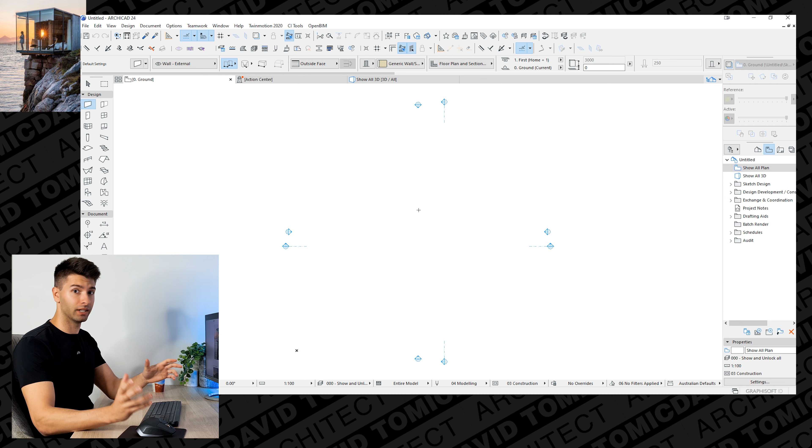So what we want to do is go to File, down to Save As, and save it anywhere you want. For me, I'll probably save it onto the actual desktop. Click Save. So now that we've saved it, it's going to continuously autosave if you've set that up, which is by default set up on ArchiCAD 24.

What we're trying to do is replicate this image here on the left, which is a beautiful container looking home sitting on the edge of a cliff. It is a relatively simple design and relatively quick and easy to model. So this is a video for all levels of ArchiCAD users. So in my personal opinion, the best thing to do here is start by actually modeling the main body of what we can see here and then progressing further on from there.

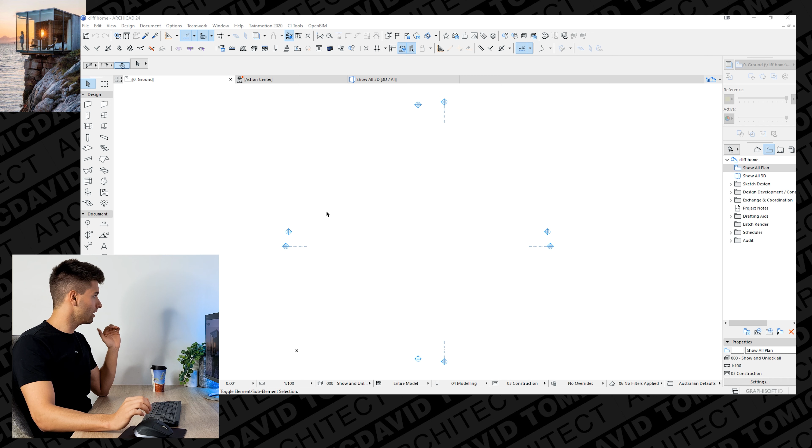So if we look at this image here on the left, it has a very thin mono-pitched roof going 1 degree backwards. It sits on what appears to be a concrete floor on 2 I-beams, and it's relatively self-supported underneath of the rock. So we're going to start by modeling the base of the floor, moving up to the walls, then to the roof, and then modeling all the elements around, and then we'll slowly start to integrate the furniture as well in part 2 of this video.

The first thing you want to do is open up the level settings, which is either Control or Command depending on your system, and pressing 7. So this opens up our story settings, which as you can see here, we have ground, first, and roof. The first thing you want to do is insert a floor below and call it footings, because we can see that we have these I-beams underneath and they are technically our footings in this development. They don't need to be 3 meters. I think they're probably only about 180 UBs, but we'll go 200 for the purposes of argument and keeping it easy.

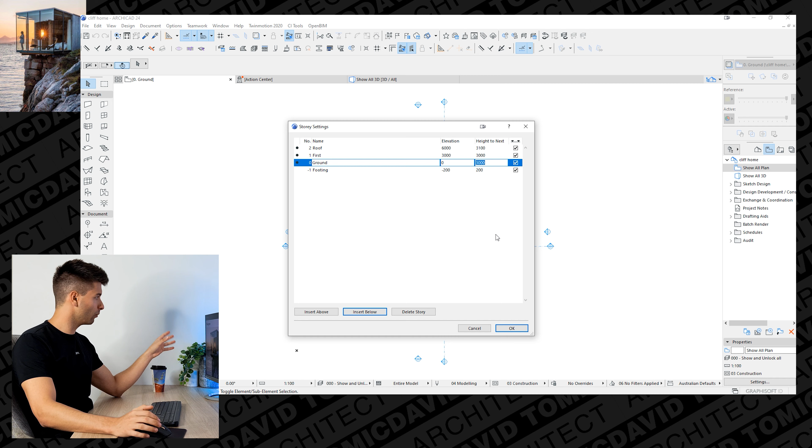The ceiling in this space looks quite high, so this lady is probably about 1.6, 1.7 meters tall, so at the pinnacle of that is probably about 3 meters. So it's safe to say that we can keep the ground floor to the first floor as 3 meters. However, because we don't have a first floor in this, we can delete that story, so we only have our footings, our ground, and our roof. Personally, I like to uncheck these on the side to remove them from elevation views later on, but you can keep them on, you can keep them off. We'll come back to that in a little bit.

So you just press OK, and because we've deleted the first story, it's going to come up with a warning. You just click delete anyway because we're not really interested in it whatsoever. So as you can see, we're already on our footings level, but because we've created a new layout, we're going to go into our organizer.

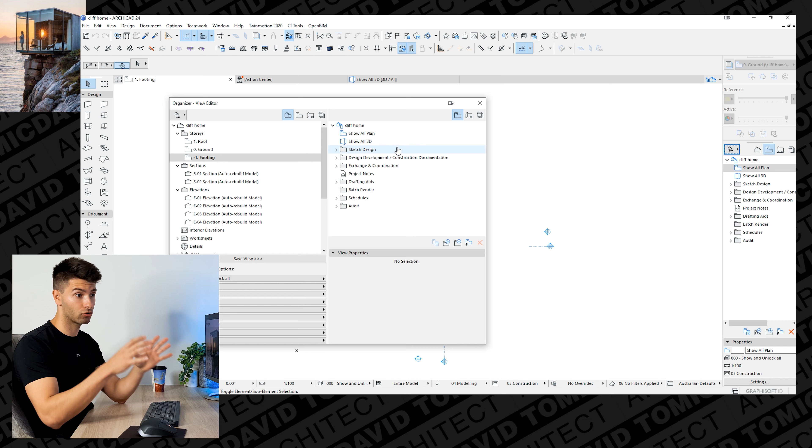So clicking this little house here, going down to show organizer, and then opening up the organizer and reassessing how we actually structure our organizational point of view. So for me, it's always easiest to just drag and drop these and create a new folder here. We're in Sketch Design, we have all these views already set up, but personally I'm gonna hold Shift, click on Roof, and drag and drop that into Sketch Design.

I'll also rename all of these to just footings. I'll probably do them in capitals, footings, rename, delete, ground floor, rename, delete, roof plan. And if I close this now, you'll see that they've popped up on the right-hand panel in our organizer under sketch design. Again, you can structure your template however you want.

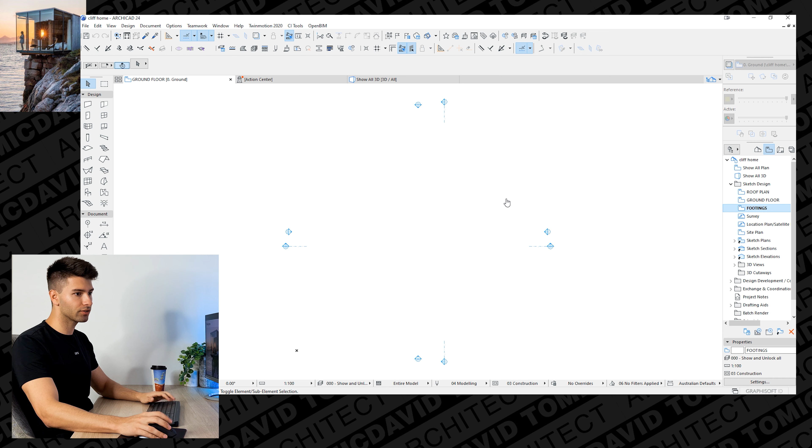My personal template is structured completely differently to this, but this is the standard template that you get when you open up Archicad. So you can see if we go into ground floor, this up the top left-hand corner changes to ground floor. We go back to footings, it changes depending on the levels. So we'll start with the footings in this case, and we'll start with just a relatively simple slab. So the slab actually sits inside the building itself because the windows go past.

So what we're going to do is create a slab using the slab tool. The slab can be generic. We'll edit the spaces and the model preferences later. So we'll start by creating a standard shipping container size. So a standard shipping container is about 6 meters long and about 2.5 meters wide. That's the 20-foot model. You can get the 40-foot model as well. It's probably not a standard shipping container, but we're just using that as the base of our guide.

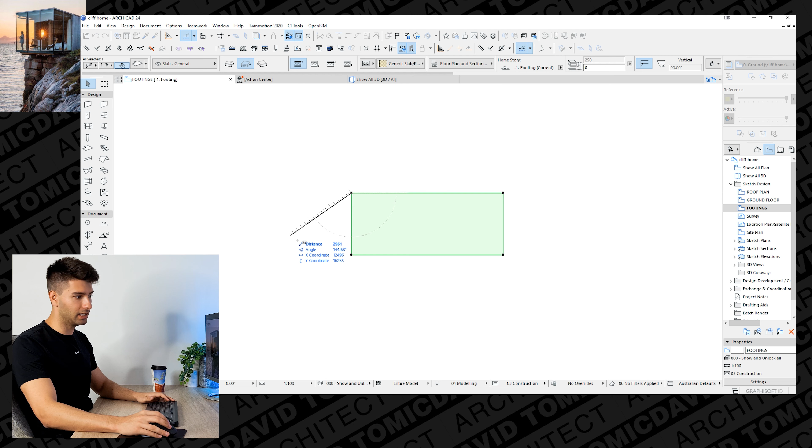So we'll create that as 6 meters by 2.5 meters. So now that we have our slab that is 6 meters by 2.5 meters, we can press the M key to bring out our measuring tool and double check that. So that's 6 by 2.5 meters, and we can start developing everything over and above that.

So we can see the master bedroom is at the front, and then I'm assuming we have the rest of the little hotel style room overlooking the cliff at the back. So we'd have predominantly our master bedroom here at the front, our entry probably at the back, and our bathroom in the back corner. So we're going to go back up to the ground floor level, and that footing will disappear. So what I'm going to do is right click on the footings and go show as trace reference, so we can see where we've actually created our slab.

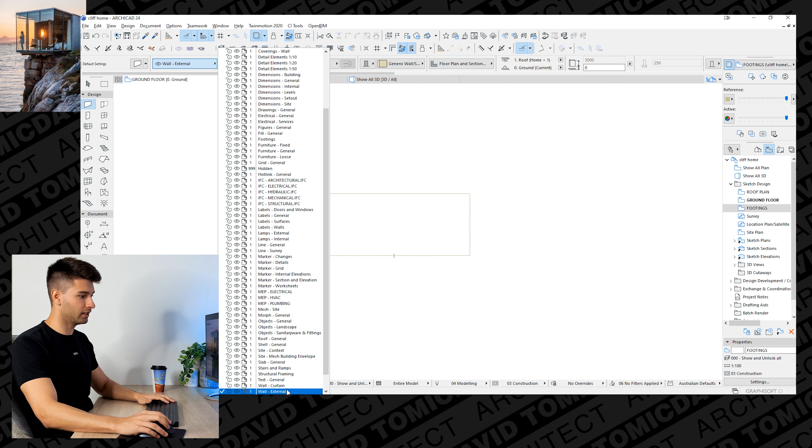And then we're going to move over to our wall tool and make sure that it is on the walls external layer. The next thing we're going to select is the type of wall. So looking at this, it'll probably be some sort of timber frame structure with a timber cladding around the outside. What kind of wall you select is completely up to you, depends what you're trying to create. So at the bottom, you'll see we have a 70mm stud partition or a 90mm stud partition. Personally, this would probably be a 120mm stud, but because it's simple and easy, we're going to use the 90mm stud option.

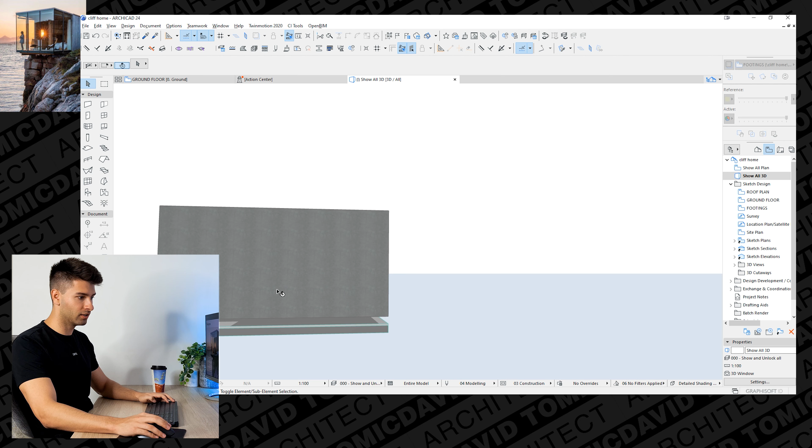All we have to do is really click, hold, and if we hold shift, we lock it in at certain degrees. So holding shift locks it in at 90 degrees, go all the way around, and we have our perimeter walls. We have the show all in 3D option here, but we can also right click, go down, show all in 3D to see how far along we've already come. So straight away, we've actually designed a slab, we've got some walls happening, and we're slowly creating this model that we see in front of us.

If we click on this main wall structure and open up the settings by clicking on the settings dialog up here, or by pressing Ctrl T, we can see how tall the walls are. So the walls are actually linked to the next story level, so they're going to be immediately 3 meters. If you actually want to change it, you're going to have to change it to not linked, and then you can change it to 2.5, 3 meters, whatever you want. And because we are using 3 meters, that setting doesn't actually matter. So we can exit out of that to cancel those settings that we messed with, go back into it, and then start playing with the actual materials.

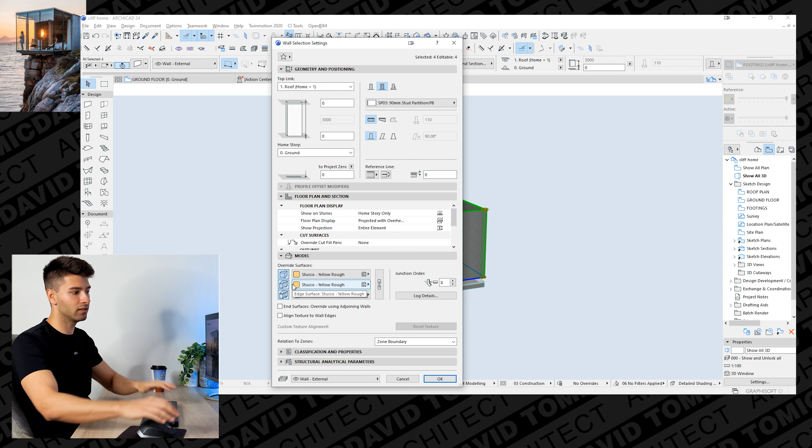So the first one is the outside face, which is the blue line along the boundary of the walls. This is the actual connection of where it ends. So if we run one wall, you can see the end of it, and the inside is obviously the inside.

Now, because this is a 2-part series, there are 2 ways to do it. We can actually create this texture here on Archicad 24, or we can just select any random texture and utilize the textures material in Twinmotion. For me personally, I think it's best to show you guys how to create a texture from scratch.

So we can actually import it and use it properly. So we want to create a timber looking texture. We do have a bunch of woods down here on the side, which is really good, but we'll go from scratch. So we'll exit out of that.

We'll go to window, we'll go to toolbars and make sure that attributes is checked. If you have attributes checked, that means you're going to be able to have this section of the palette open. What we're looking for is this little brush. The brush lets you change all your materials.

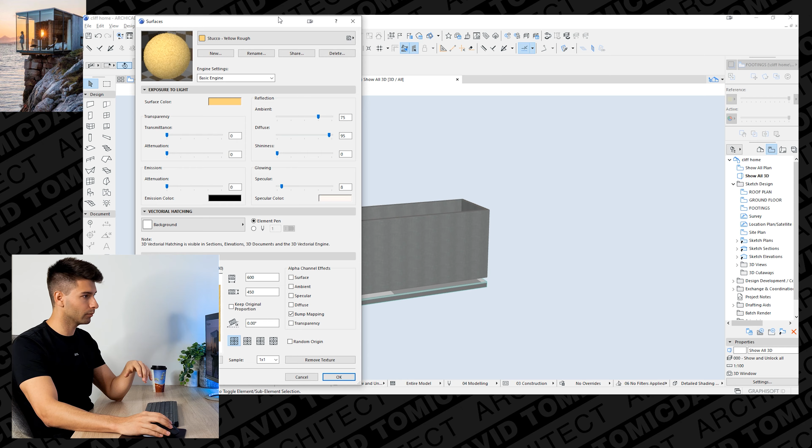So we're going to click on the brush, bring that into the screen that we have recording, and we'll select wood just to make it simpler.

That is the wood that is currently being used, and we're just going to click new. And again, I'll drag that over here and I'll go wood vertical gray. It doesn't matter what you call it, you can call it anything.

You can change all your materials however you want. So we'll just go duplicate. I'm going to change the surface color from this brown to a more gray. So about there is fine for me. It's not really that important because we're not rendering in Archicad, we're rendering in Twinmotion.

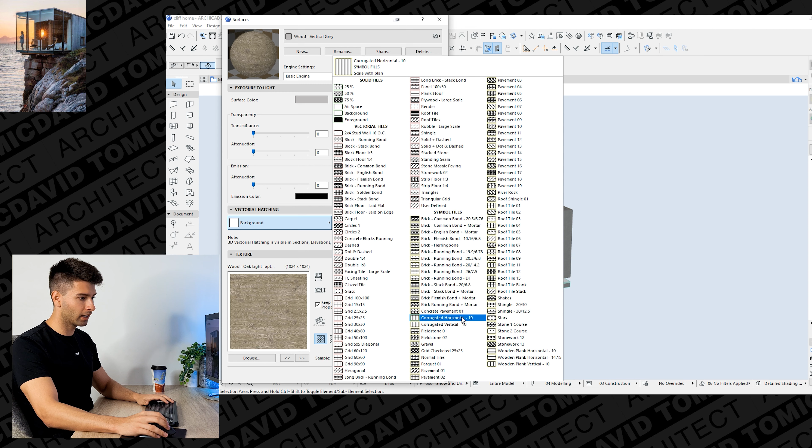And then we're going to change this vectorial hatching background. Now, off the top of my head, I can't remember if there is or isn't, but there is a corrugated horizontal 10mm hatch there. So we can use that for now.

And then I'll also show you how to create a vertical hatching to actually emulate this hatching on your elevations if this isn't the correct one you're looking for. We also want to change this material here to something else.

So we just go browse, it'll pop up another window and we're going to add a new one. For the purposes of argument, I've already got 1,000,001 different textures saved. They're just Googled seamless texture.

Look for something similar to that image on the left-hand side and try find something nice that looks kind of similar. So that one there is probably pretty good in my opinion. We just go File, Save As, and just save that to Downloads and go Save.

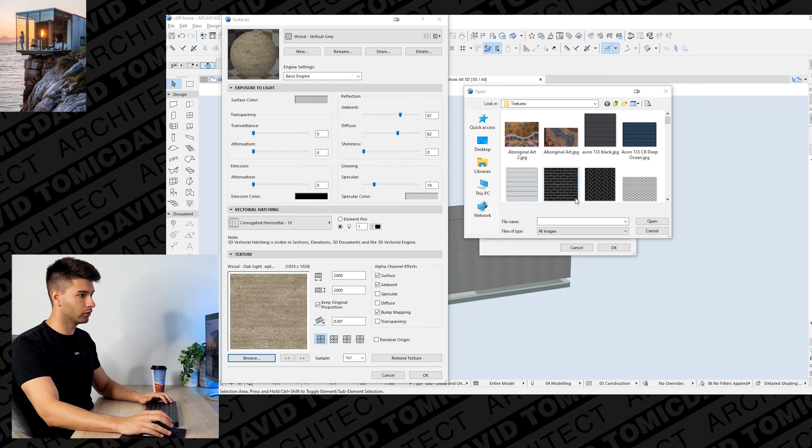So we can close out of Google, come back into this textures. If I go to my downloads, wherever my downloads are, downloads, find that wood texture, open it up. It'll open up the wood texture here. We go OK, and it replaces that wood texture.

Now, I like to keep the proportions of the original texture that we've actually used because that way it doesn't mess with the size and scale and proportions. So we've changed that, we've changed the surface color. This element pen, if you're using a black material, you'll probably have to change the element pen to a different color because you won't be able to see it.

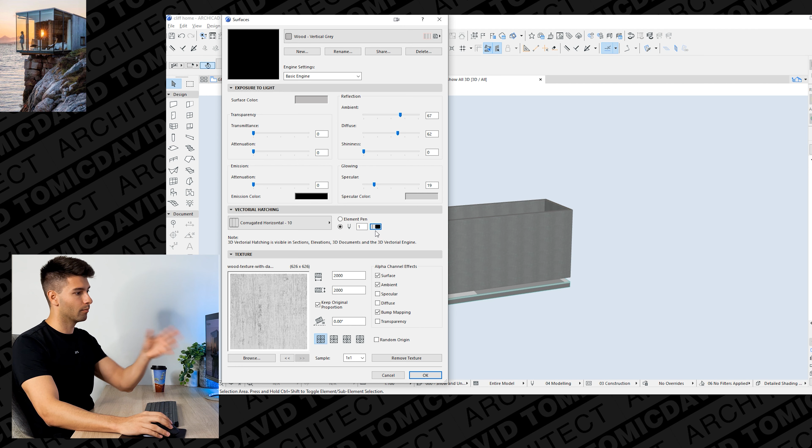But in this instance, it'll have nice black lines in the elevations, which we'll get to in a minute. So then we just click OK and we've created a new texture.

Now, because the vectorial hatching we've selected isn't identical to what is shown on this image on the left, we want to recreate a better vertical hatch. So what we do is come up to this fills section and select something similar that we're looking to replicate.

So in this instance, we're trying to replicate just some vertical lines and keeping it very simple and very easy. I think for the purpose of argument, we can select most of these, but go through and select something that is similar to what you're trying to create to really make this process as easy as possible for you guys.

I think maybe the Hebel pattern at a vertical 45-degree angle is probably pretty good. So if we go new vertical timber and we'll say it's 125mm spacing for the purposes of argument.

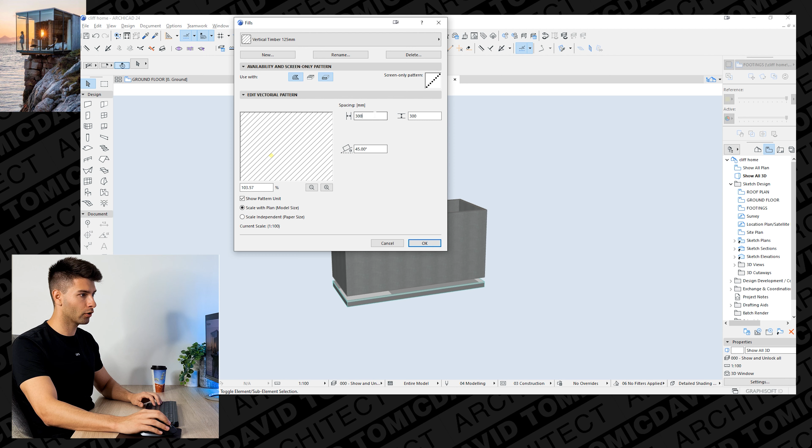125mm, 125mm, and 90 degrees. So now we have 125mm vertical spacing of timber, and to make sure this pattern changes so we know exactly what it is.

We're going to click and hold to get rid of those patterns, and again click and hold to draw some new lines.

And you can see up the top now it's recreated a new vertical timber pattern. Before we close this palette, we just want to make sure we tick all three of these so we can use it with absolutely everything. That way we don't have to come back into this palette again.

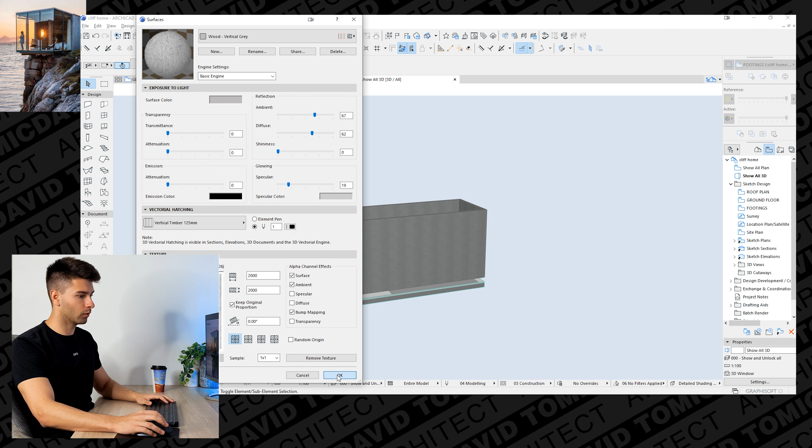We click OK, go back into our surfaces and rechange our vertical hatching. So if we change this to vertical timber 125, click OK, click on this wall, go back into the dialog settings, change the outside to vertical gray wood that we created before and click OK. We'll see that we have that texture that we imported from the internet directly applied here, so we can mix and match it later on in Twinmotion.

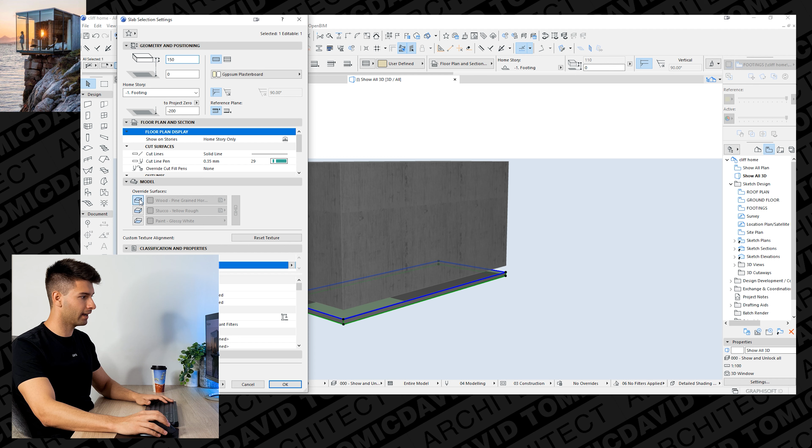We also have our slab down the bottom, which is just a generic slab. We probably don't need it to be anything, it's just going to be concrete, so we'll go user defined and open up the settings again by clicking Command T or clicking on that dialog box. We can change the structure of the basic composition. It probably looks like a 150mm thick slab according to that, and we're just going to tick them all, link them, and change it to concrete if we can. So it's just going to be a concrete structure.

We click OK, and then we're going to click on this corner and drag it all the way up so it's actually hidden underneath this wall here, because as you can see in the image, it's recessed into the wall.

So because the front part of this building here is going to be mainly windows and glass, we can see that the pitch of the first windows on the side is raking a little bit with that 1 degree skillion roof. But the front section of this glass is entirely flat.

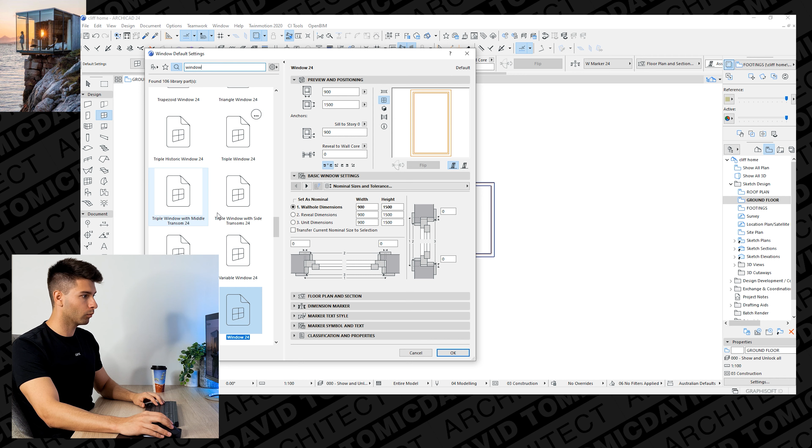So if we go to our window tool, select window, and type in window at the top, we're going to have a variety of all the different windows that we can select. So if we scroll to the top and just search the windows which we best think is going to work for this project, I think trapezoid window 24 will be absolutely perfect.

They are entirely fixed windows, so we'll just go fixed glass. So they can't open, they are just genuinely fixed windows. We'll start going through these settings one by one to try and actually replicate this window here. So we know that window is 3 meters tall, and we also know it's probably about 2 meters wide.

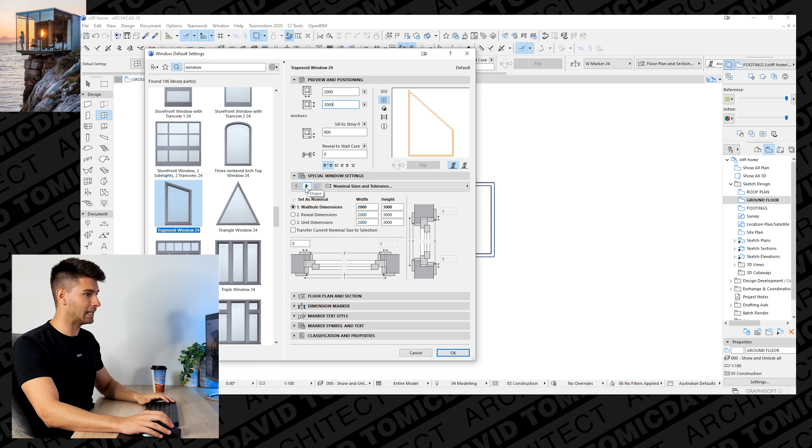Now we're going to continue to make that sash in the middle and change the pitch of the raking of the top of this window. So we're going to go through the settings one by one. So we have to change this to by top angle and total height, so it doesn't mess with our total height over here.

Now that I'm looking at this, it's probably more so 3 degrees, if not more, maybe 5 degrees. Yep, I think 5 degrees probably looks a bit better on this representation here. So we're going to change that window to 5 degrees. The lower side of that's going to be 2825. The upper side of that's going to be 3 meters like we set it.

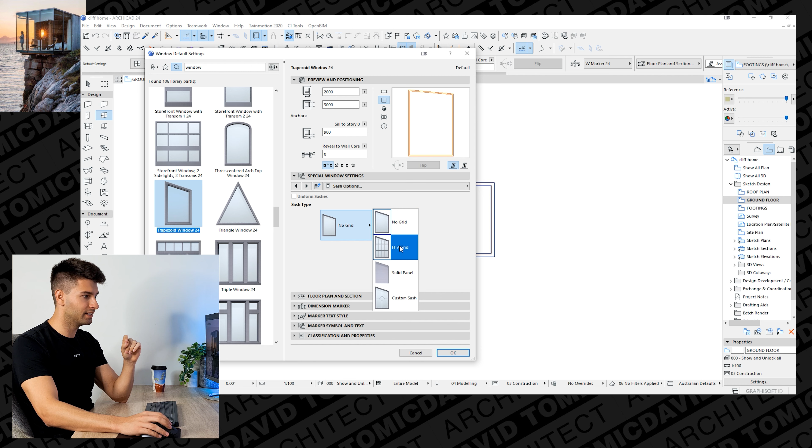And then we're going to keep going through them to find the sash in the middle. So we can use this grid section here to create sashes. And the easiest way for me is always the HV grid. We only need 1 vertical and we only need 2 horizontal. So there we go, we perfectly have that section set up.

Now, I don't like the fact that it's orange, so you can immediately override it by overriding lines and overriding fills. So going straight to black, and perfect, that is completely overwritten. Now we click OK, and we can actually center our window to the corner here.

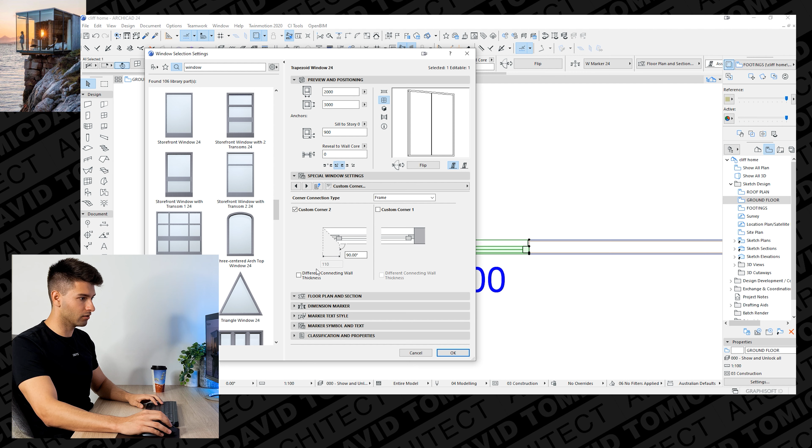The one thing we forgot to do is actually create this corner glass here that is more so a silicone joint than anything else. So we'll open up those settings again, go into the special window settings, and find our cornering in this menu. So custom corner is under fixtures and settings. Custom corner 2, we want to rotate it at 90 degrees, and we'll click OK.

So we've actually selected the wrong one, which we can go Control or Command M, click the center to flip that window across. If we click and select the drag function, we can drag it to the corner. By holding Command or Alt, we can replicate that window very simply.

Now we have those 2 windows created on the side. All we need to create is that last third window there.

So we open up our window tool again, and we're looking for window 24, a very standard window that we can mess with and play with to create the best replica we can find. We'll go through the settings just like we did before, fixed glass, start at the top, and slowly tick through. We don't need to change too much of these settings because it's basically just a very basic window, and all the frames are the same.

We're going to change that HV grid again to 1, and we'll set it to 3 meters tall and 2.5 meters wide, because that's how wide we made our sea container in this instance. The last thing we'll change is our custom corners, so both corners in this instance are 90 degrees. We click OK, place our window, and then drag it to the end.

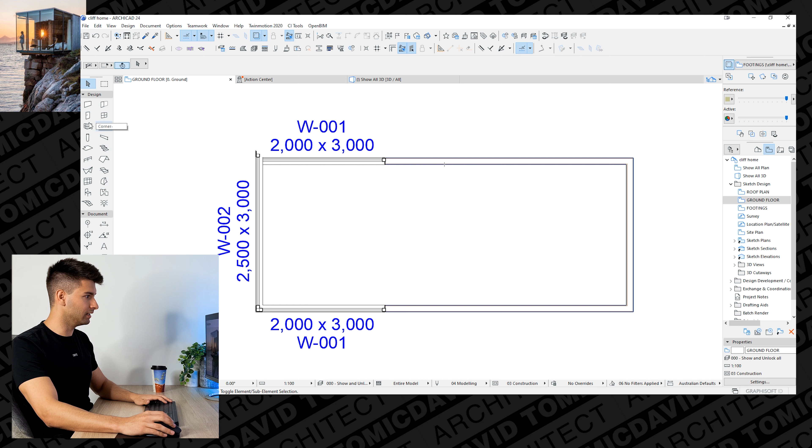So I clearly haven't made this the right size. If I click on my dimension tool and find out how big we made this, it's only 2.3 including that. So what we'll do is actually extend that 120 mil, select these 2 walls and press Control I to join them again. So again, select 2 walls, Control I joins them at the top. We're still probably not at that perfect 2.5, but that's okay, that'll work for now.

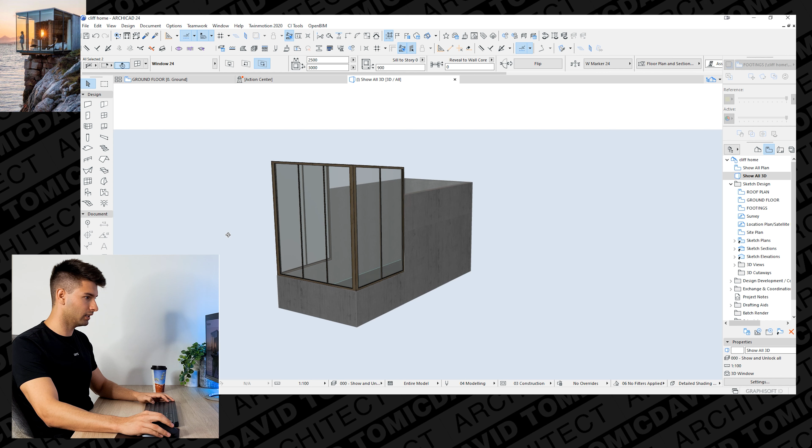Now we have those 3 windows created and overlapping perfectly. If we go back into our 3D model, they're sitting too high up, so all we'll do is select those 3 windows and change the sill height to 0. Now we see that concrete slab underneath sitting just like it is on this image here. The only difference is potentially the window frames are the wrong color.

So we click OK, and now we've changed our windows to these black frame industrial windows, very similar to what they have over here. And we're going to continue creating this interior model.

So if we move back to ground floor plan, what we can see is the next real basic principle is the roof. If we move up to roof plan and do the same thing by going over show as trace reference, to draw our roof all we need to do is come to our roof tool and select either the flat roof or the pitched roof.

In this instance, we're doing a single plane geometric roof. So we're going to select our pitching point from this side over here, and tell it that it's raking this way upwards, and then all we have to do is create a rectangle around. So we've created our rectangle, our roof is created.

If we go back to 3D, we'll see it is ridiculously high and ridiculously too thick. So we'll just do 5 degrees, and what we're going to do is change the settings and thickness of this roof, because as you can see on the image to my left, it is very thin in comparison to what we have drawn here.

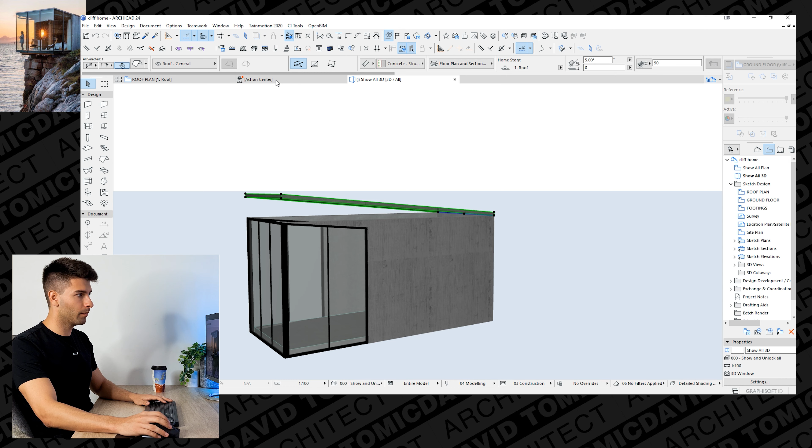So for some reason that has a hatch on it, and we definitely don't want that. So we're gonna jump ahead a little bit here and go to surfaces again, find concrete 2, which is already selected, this grid, and we're just gonna turn that grid off. We really don't need anything to show there, so we're just gonna select it as airspace and click OK.

Now what we have to do is click on the edge and drag that roof vertically down as best as we can. By holding shift, you can go along the y-axis, select it perfectly at the edge of that roof, and there we go, we've lined that roof up to the top of this building.

What you'll see is we haven't cut any of the walls, so we're going to select all the walls and right click, connect, trim elements to roof shell. You'll get a little warning, you just click trim, and our roof is created. And there we go.

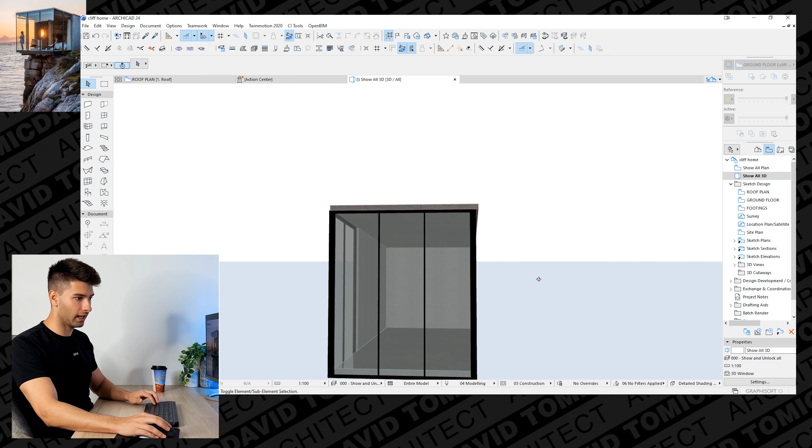Now we have our building starting to come together, starting to look like this. It's potentially a little bit too high, so this lady may not have been 1.6 or 1.7 meters tall, but that's okay. We have the basic elements of what we see here.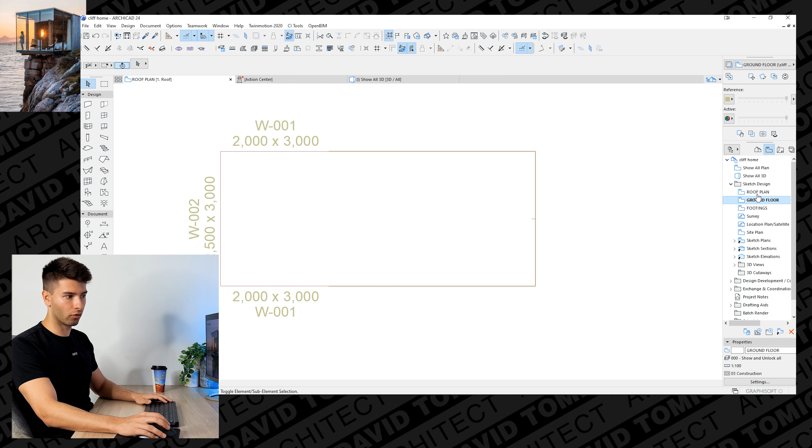If we scroll back up to our ground floor plan, we can see one square window above the kitchen, and one small square window near the bedroom, which I'm guessing is either next to the bedside table or in the bathroom. So if we want to create that, we go into window tools again and open up the window palette.

To reset this window 24, we just click on another window and then click back on window 24, and we're back to the basic settings. They look like awning windows in this instance, so we're going to go top hung windows to give us an awning.

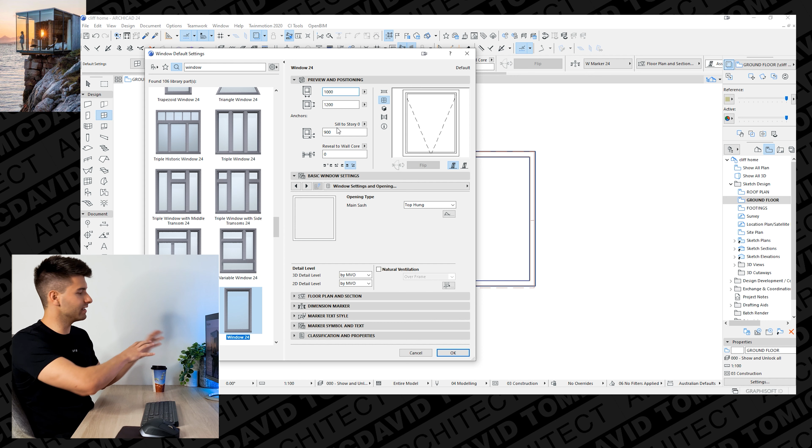They probably look 1200 by 1 meter. Yeah, so 1200 by 1 meter looks approximately right. We're really guessing because we don't have any information but that image.

So what we're going to continue doing is changing those model attributes, same as we did before. Just tick all of them, change the window to ivory black, and click OK. Now that window is somewhere about here, and this window is somewhere about here.

Now those windows definitely look too big, so I'm going to reduce them in size to 600 by 800, and this one is too low. I reckon that's only about 500 mil off the sill, maybe even lower, 400 mil. So we're about 400 mil off the sill here.

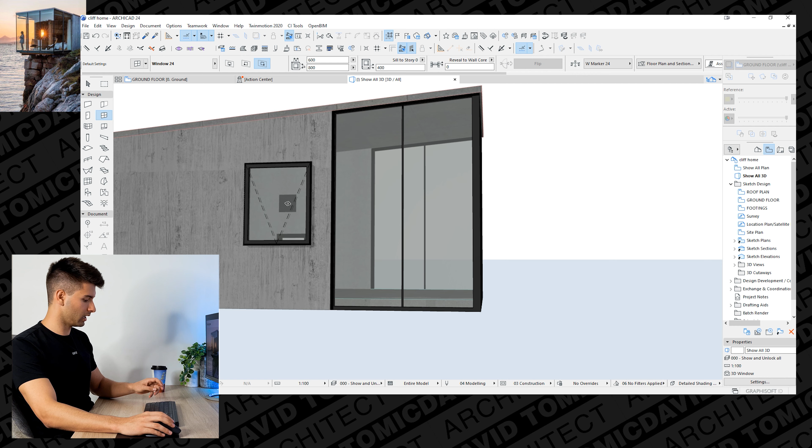We're going to hold Alt or Command on our keyboard, then hold Control and Alt to duplicate those settings and replicate them for those two windows, and we're just going to move that one up to 1 meter, because the kitchen bench is normally 900 mil. Putting it 100 mil above that kitchen bench is probably about accurate.

So now if we go back into our footings layer, we can still see our building as a trace reference over the top. We'll go to our beam tool and open up the beam settings so we know what we're doing here. If we go down into segment, we automatically have the setting to create it into an I-beam, and then we can scroll through these options to find what our beams might look like.

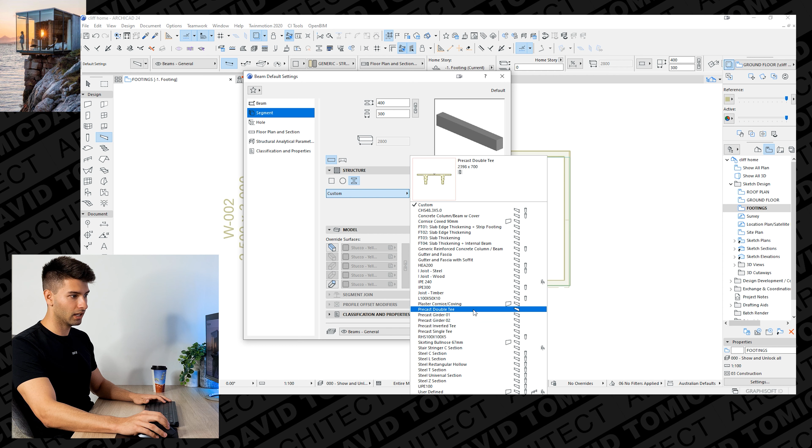So in this instance, this IPE 240 is probably the best option we have at the moment, and it automatically changes that shape to the UB.

We're also going to change the materials to some sort of metal. It doesn't really matter what we do, it's probably steel, so it's gone to a dark grey. It's 240 tall by 120 wide, which is probably perfect for what we're looking for.

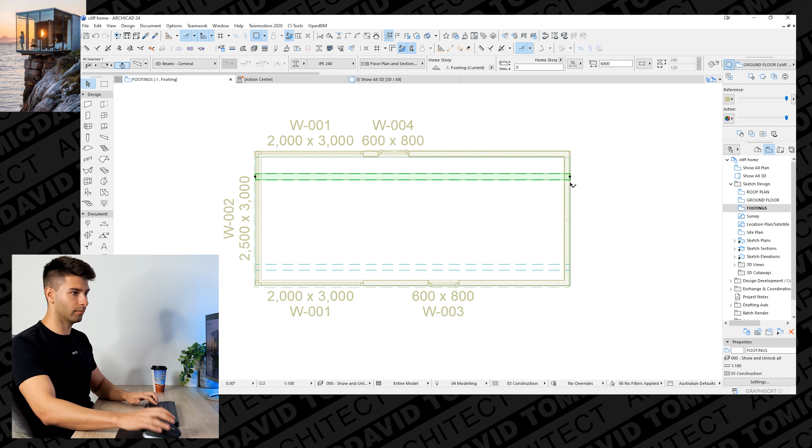We're just going to simply draw two beams running this way, and now we can copy this by going to the drag tool and then pressing Control to hit the plus and moving that further here. We'll probably be a little bit more pedantic about it and move that 500 millimeters from the edge and do the same with that one.

So now we've moved our I-beams 500 mils from the edge. They are still floating in thin air, but what we'll do is just select them, go Control D, move them up and run them underneath the building.

500 mil was probably a bit of an overkill, so I'll move them back 200 mil to each side. Something that's starting to resemble this a lot better.

What you'll see is also a connection base underneath, which is a simple beam. It isn't as complex as this, so we'll go back into our beam tool and we'll just go a basic square beam. That looks like a 90 by 90 piece of steel that is orange for some reason, but we'll keep it as generic steel in our model.

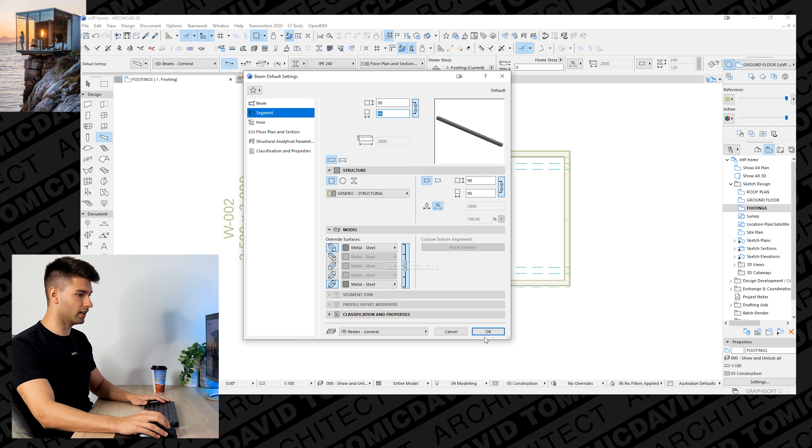It does look like this building is actually cantilevering a little bit, so maybe we push this beam back 200 mil, click on this, select the stretch tool and move that back in line. So now our building will cantilever over a little bit. We'll do the same on this side.

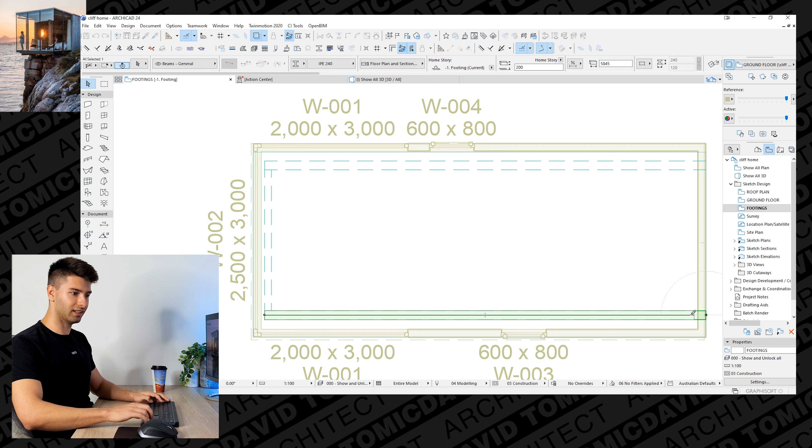By holding shift and then pressing the D function, you can change these settings. So if we have the stretch tool activated, you'll see that as we move it back, the distance remains the overall distance, but the second you hold shift is when it changes. So not holding shift gives 4,000, 5,000; holding shift gives 1 meter, a couple hundred, depending how far you are from this.

So by holding shift, moving back, pressing the D key at the same time, I can let go of shift and D, type in 200, and we have our overall beams moved back 200 from the edge.

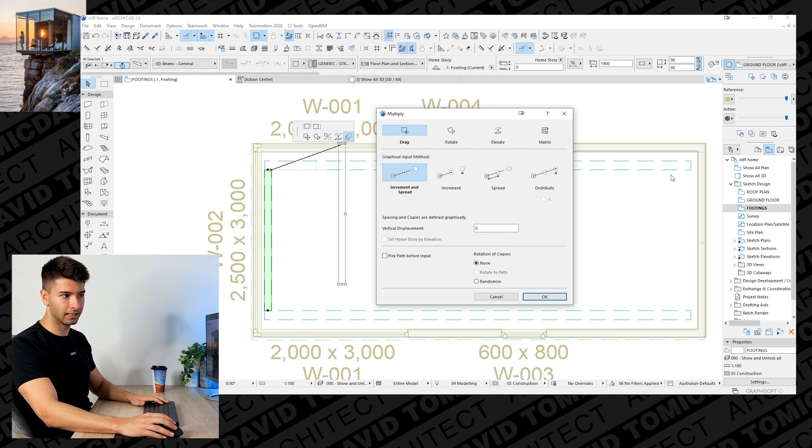With this beam here, what I want to do is click on the outside and select this multiply tool. The multiply tool is super handy and it's very easy to use. In this instance, I want to distribute. So I want to click here once and click here a second time and create, well, there's 6 meters, probably, let's say 5 of these beams at a 1 meter spacing. So we click here once and we click there a second time, they're all copied, they're all replicated.

So if we go back down to our 3D model, you can see we've created that framework. By holding shift and clicking on all of these, we can select them at the same time, and then pressing Control and D, we can move them to the top of these beams. Now, as you can see, they're probably not connected to these beams at all. They would most likely be welded direct fixed to here.

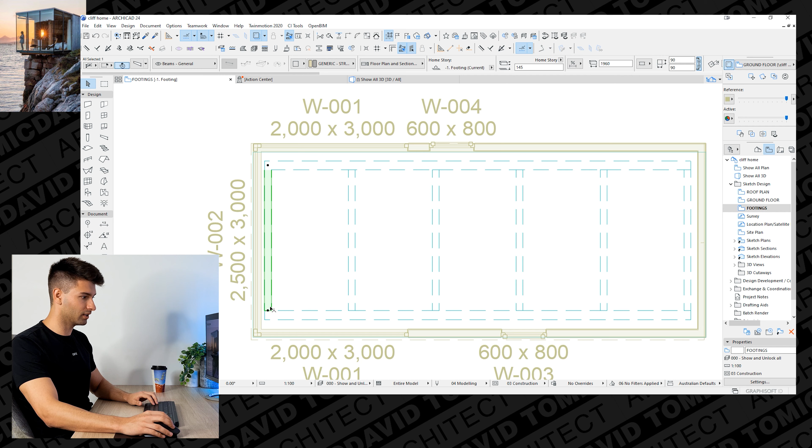So the easiest way to do that is just to stretch them to the center, and then personally I'd just delete these and repeat the steps we just did. So offset, multiply, distribute, 5 copies, okay, stretch, drag, done. Now if we go back to our 3Ds, they'll be pushed to the edges, they'll be welded direct fixed there, which is something that you can note later on. But overall, we have the shell of our building completed.

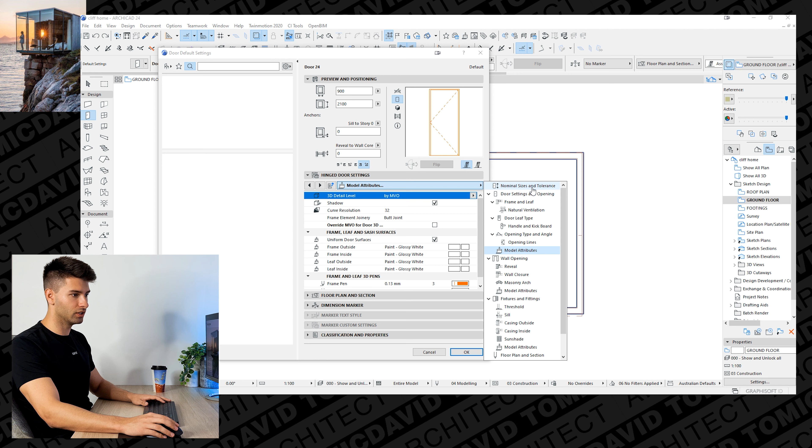Okay, so now from a design point of view, we probably want to do something in the interior. So we're just going to go to the ground floor again. We need to have some sort of entry. So we'll go door, open up the panel settings. The first thing we want to do is just go back to the top. We can change the size of the door, the style of the door, everything in here by going through. So this will probably be a full glass door because everything else is glass in this instance.

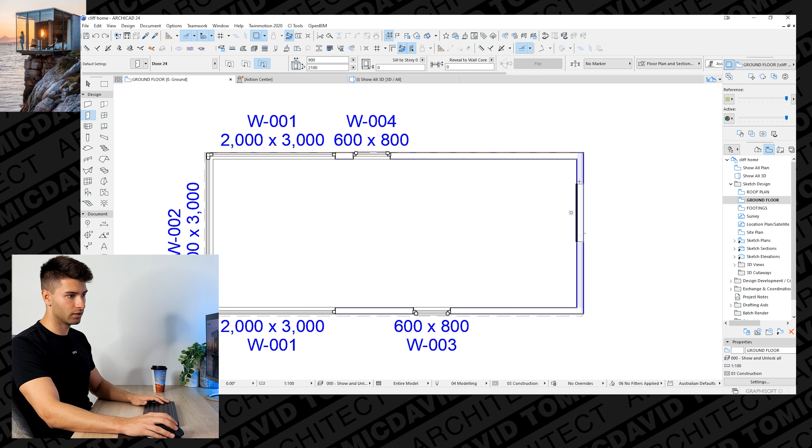We can click on this little square door here to give us all of the framing widths and sizes. So we'll just go 50 mil, 50 mil, 50 mil, and it'll give us a really nice, clean, thin framed door. All we have to change there is the model attributes, same as we did before. So there it is, paint ivory black. The glass can stay the same, and the floor plan will tick those, change it to black. Perfect. So now we can install our door here. 900 wide is a relatively good sized door, and we can begin understanding what this floor plan could look like.

So internal walls, we'll change our layer from walls external to walls internal. We'll change our stud partitioning. Doesn't really matter. Most internal walls would still be 90 mil, but we can change it to 70 for the purposes of argument. Drag that over here, because I believe just to the edge of that, 2 meters, and there's our bathroom constructed. What you'd like to do and make sure is that you have enough distance to walk.

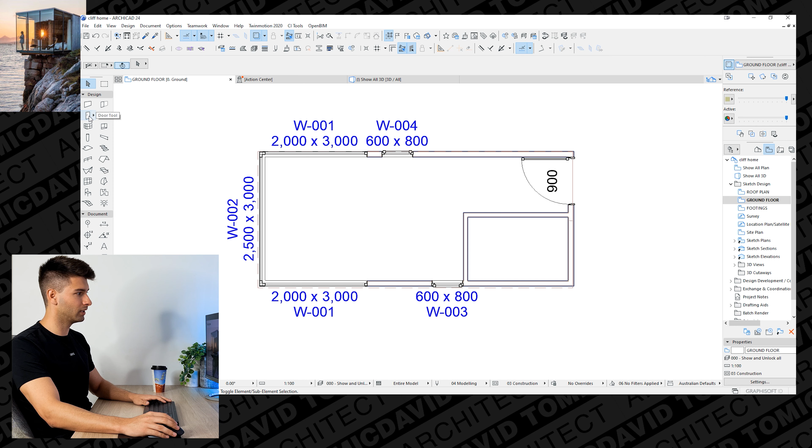So 950 mil is probably a little bit tight. I'd personally like it at 1100. Selecting those two again, we can go Control I to merge them quickly, and then we don't need that dimension anymore, so we can delete it. We have our bathroom here, so we also need a door. We don't want a glass, it'll be a very solid door because it's your bathroom, you don't really need to see inside. And we'll change the width of that door to 800 mil, so it's a much smaller door.

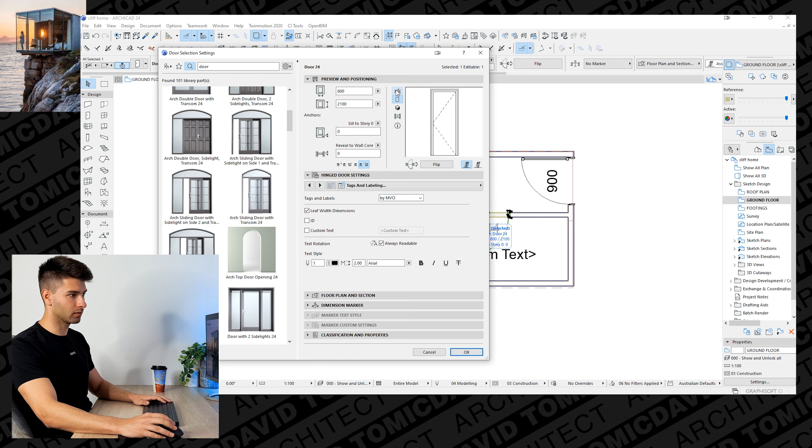And then if we just drop our little door here, we don't need any of this custom text. So if we go back into our settings, now if we go into tags and labeling on the side here, we can discard that custom text. So if we click the floor plan, you'll see that that changes the custom text. The leaf width dimension is probably not correct, but for the purposes of this, it doesn't really matter. We'll keep it at 744. And now we have our bathroom created. It'll be a very tight bathroom, but we'll play with that in a second and make that work really well.

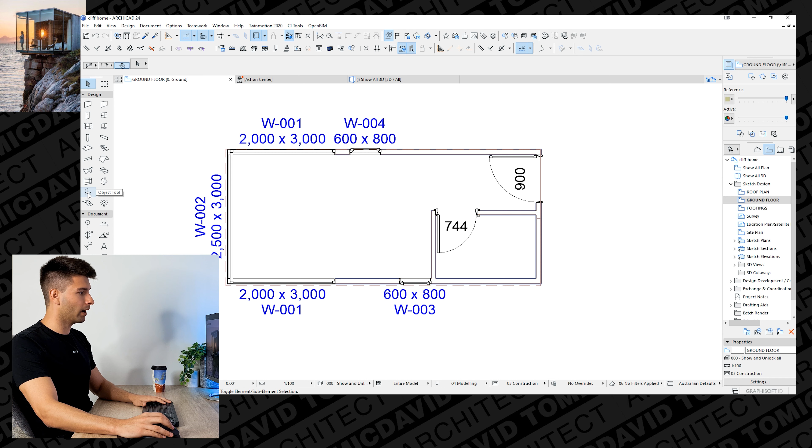So let's start by adding a couple objects. So we'll go to the objects, change the object layer from landscaping to MEP plumbing, and then we're just going to look for a toilet object. The toilet objects could come up as a different name for you, so WC24 for me, and I don't like that it's purple, so we override everything and just make it simple black. So that gets rid of that.

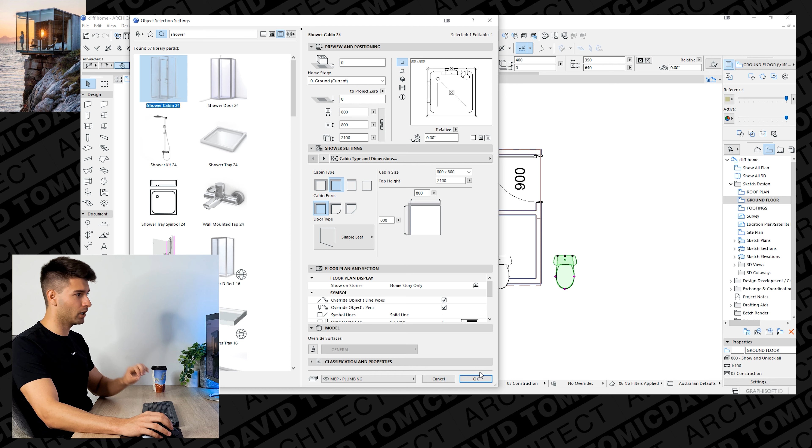So we're going to drop our toilet in. We're not going to really worry about where it is at the moment. We're going to copy it across. We're going to open up our settings again, put in a shower, look for our perfect shower object. So we have our shower cabin. That is a very basic object. It's good for size. 800 by 800 is a very, very small shower, but we'll see what we can fit. We'll maybe make it a little bit bigger, and we'll copy that across.

The last thing we need in our bathroom is a hand basin. So a simple hand basin for the purposes of this design. We can change those settings again to make that nice and black, and we'll probably pick a rectangular hand basin because that's a bit old and ugly.

Now, depending on the type of shower that you use, it could be a screen door, it could be a curtain rail, it could be all sorts of different designs. So it really depends what you're planning on using, but because it is such a small space, we'll assume it is a curtain rail. So there's no doors swinging, there's no doors whacking. You can kind of just enter it freely from any side.

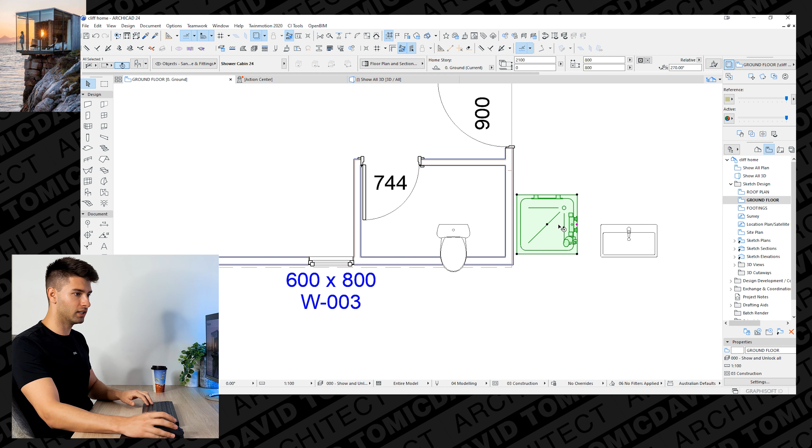We want to rotate this shower, and the easiest way to do that is Control E, or you can click on one of the black dots and select the rotate tool. By holding Shift again, we can do that 90-degree rotation, and then Control M allows us to flip it and mirror it 90 degrees. So Control D to move that toilet out of the way, Control D to move that shower into this space here. Control E lets us flip the vanity, move it across to here.

And as you can see already, this is a very, very tight space, and this isn't going to work. So that's why it's always good to understand the spacing and sizing of everything. Now, in my personal opinion, this just won't work. It's not going to work no matter how much you move it, how much you shuffle it. And if you are designing it from scratch, you want to make it a bit wider.

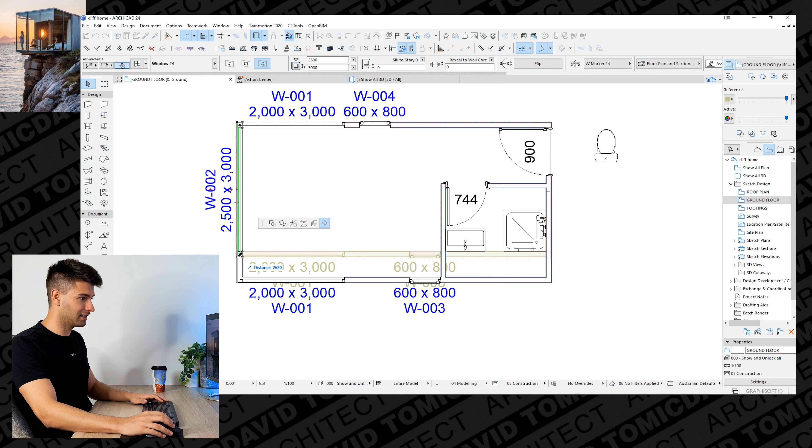So personally, what I would actually do is drag this wall at least another 500 millimeters, if not even more, to make this bathroom significantly larger, connecting all these walls by pressing Control I, and then simply extending this window by holding the move node and connecting it to the new edge. So now that's 3 meters wide. We have a much larger space for this bathroom. We can move this across and we can actually put our toilet next to our shower. So we'll move the vanity to the middle.

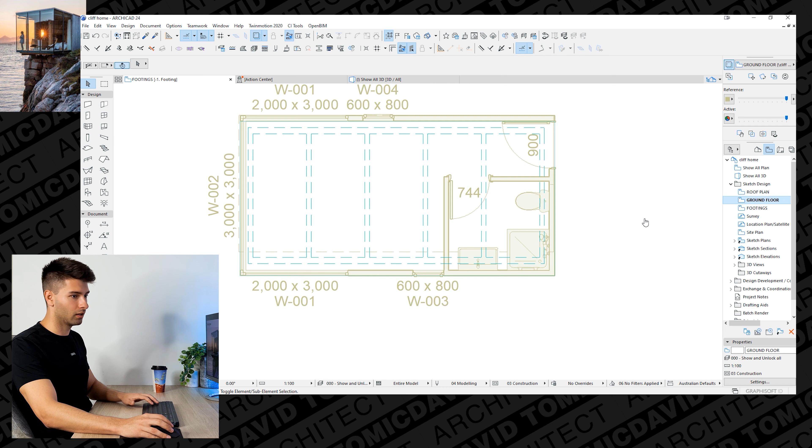Now, unfortunately, we'll have to go back to our footings layer and readjust our footings. So the easiest way is simply by starting with the slab, extending it across and moving that 500 millimeters, selecting all of our beams in the middle and dragging them 500 millimeters down. There are alternative ways to do this, but this for the time being is just the quickest and simplest way to show you guys. So now we move back to our ground floor plan, and that is our roof that we also have to extend 500 millimeters. And we have our main space created.

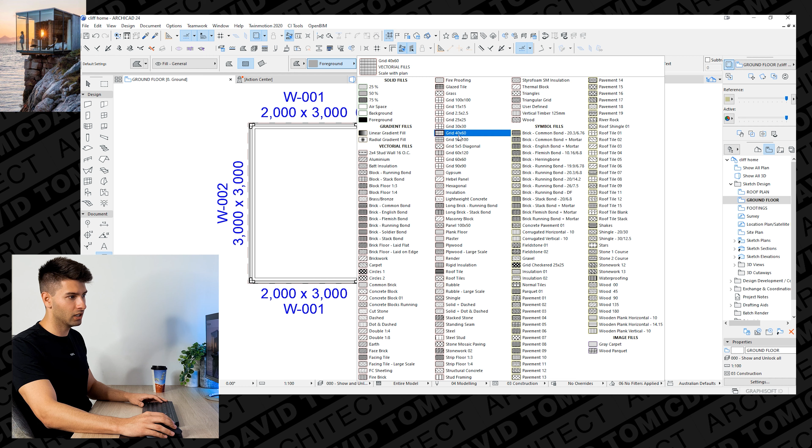So now because this is a bathroom, we want to show some tiles. We'll go to the fill tool. We have to change this across to our very first option to be able to get a lot more options. This is a 300 by 300 tile, 250 by 250, 400 by 600. So 300 by 300 is a good example. Click and drag, and there we go. We're showcasing that as tiles.

Now the next thing we want to do is create this little kitchen over here. So what we'll probably do is just simply extend that wall across a little bit further. And again, we're going to need more space to actually create that kitchen because we only have 1 meter here. If we put a 600 deep kitchen in, it means we're only going to have 400 millimeters to walk past and squeeze past our kitchen. So very similar to how we dragged that out 500 mil, we're going to do the exact same on this side. So now we have a lot more space on this side, which means we can also most likely put that bookshelf in there instead of a wall.

So we'll get rid of that wall back there and we'll start creating our kitchen. The easiest way to create a kitchen is using an object. We'll come into objects. We have a number of different kitchen elements in ArchiCAD 24 that you can choose from. It's probably just going to be a very simple kitchen, so we're just going to select that kitchen there, which isn't anything fancy. It's just a 3 cabinet kitchen with a sink in the middle. Apply our kitchen to the edge there.

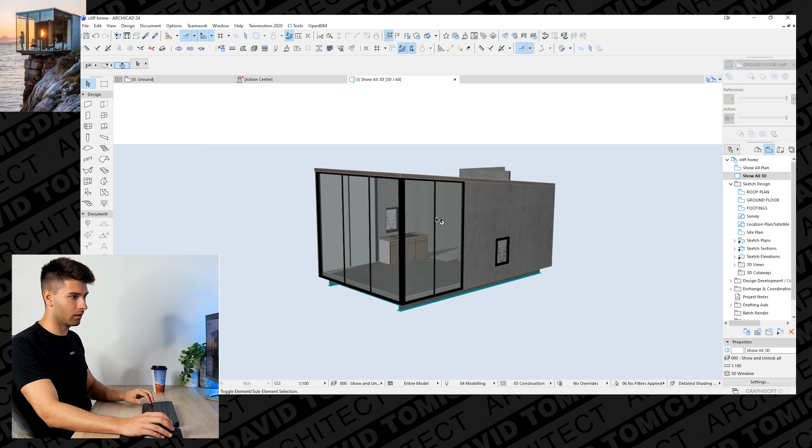Now, if we look at the 3D again, we'll see a couple things that have gone wrong. These 2 walls are over the top of the roof, so we're going to trim them to the roof again, similar to how we did the exterior. We're going to come to our 3D, drag the kitchen and the window up a little bit in line with that slab, because we actually created that slab wrong. And overall, we're probably not too far from the look of that kitchen there. So for the time being, we can just keep it as is.

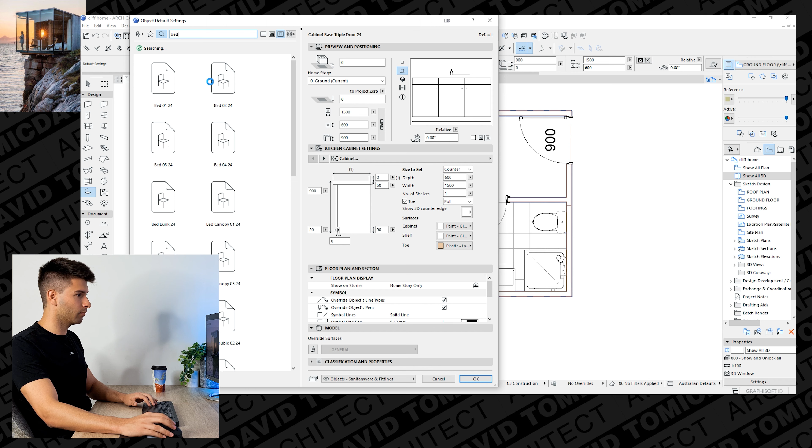If we go back to our ground floor plan, we have our main kitchen. We have our bedroom, but we don't have a bed. So we're going to create a new object, type in bed and pop in any random bed for the time being. Use the rotate tool to rotate it how we want. Push it down, and there we go. We have our first bed. I would actually be tempted to say that bed goes that way, perfectly along that wall, and then we'll import that bookshelf in Twinmotion. Now really all we have to do is put a couple bits of text in and showcase the elevations of this building as well.

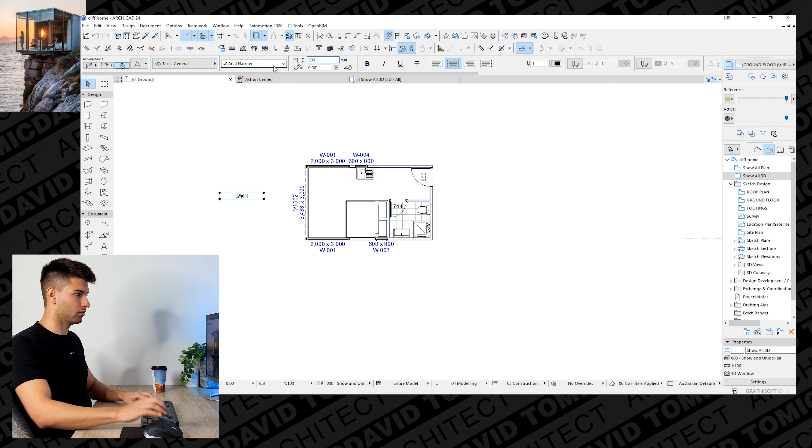So for the text, it's very simple. You go to the text tool, tap anywhere, type in bath, and change it to black. We want to center that text, 200 millimeters, and put our bath here, copy it across, bed, copy it across, kitchen, and lastly, we'll call this the lounge for the purposes of this design. And there we go, our ground floor plan is completed.

Basically, at this point in time, we are setting up some elevations and taking our completed ground floor plan and elevation designs into a layout book to export it as a PDF. You'll see that I've already dragged these 4 elevation markers closer to my building and changed the color of them. All I've had to do to change the color is select them all, click on the elevation settings dialog, go into marker, uniform pen color, and change that to black or whatever color you want.

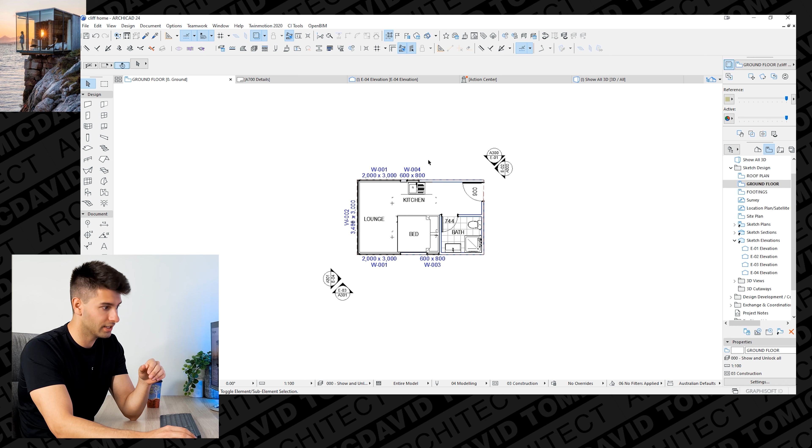Personally, I like to set them up similar to this style, very close to the building, and they are named appropriately E1, E2, E3, E4. All of those correspond with the elevations under the sketch design elevation sections here. So elevation 1, if we click on it, will showcase the building from this side, 2, this side, 3, that side, and so on.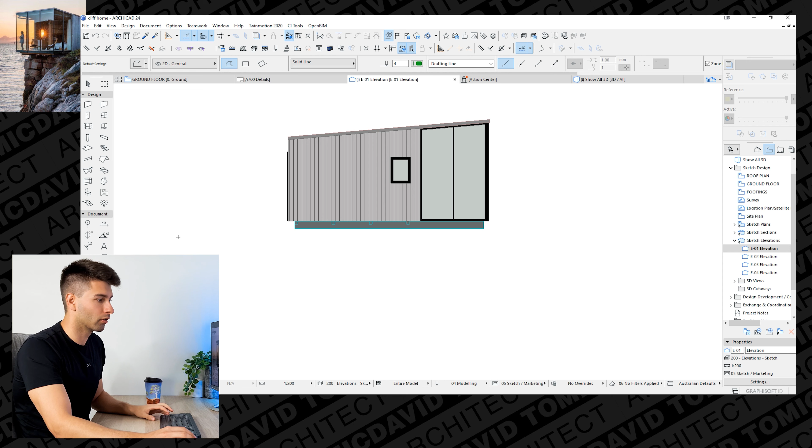So if we were to click on elevation 1, for example, it would open up that side of the building looking away from the rocks. The first thing we want to do is take a polyline tool, change it to green because that's my color of preference for the ground level, and get away from the arrowhead. We want to start drawing a natural ground level that somewhat resembles what we see in the image.

So what we've drawn here is a simple green line just stopping before the edge of the building, and it falls away indicating the rock levels and then the water level down below. NGL in Australia stands for natural ground level. This could mean a number of different things in your region and in your zone, so call that whatever it needs to be called, but for the purpose of this, it's just simply NGL.

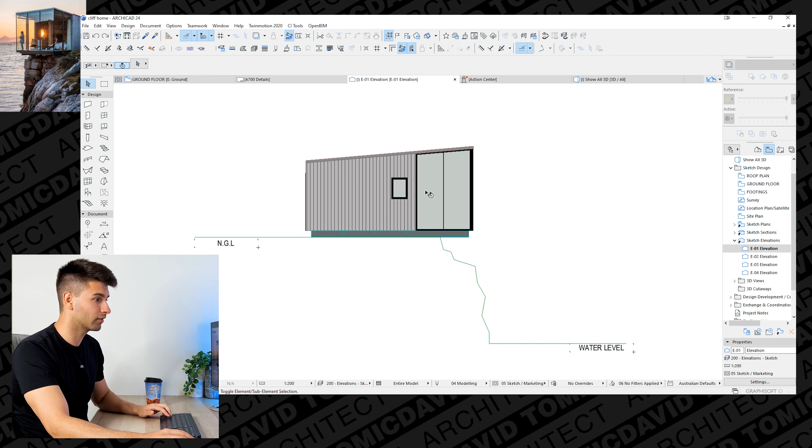The other thing that we can do on an elevation at a very early sketch design stage is just showcase a couple annotations of what is going on in this. So we could, for example, show an arrow from here to this cladding saying timber cladding, from here to this window saying window, and another one to the roof saying roof at 5 degrees.

So just as simple as that, all we had to do was really draw a polyline, change the color to black, select an arrow and draw our arrow as required and put some text over the top. So changing it to black, that's exactly how we created all of those annotations there on the side. So all we have to really do now is replicate it throughout the elevations. Because I am recording this for the third time, we'll jump through these elevations and I'll just talk you through why I did exactly what I did.

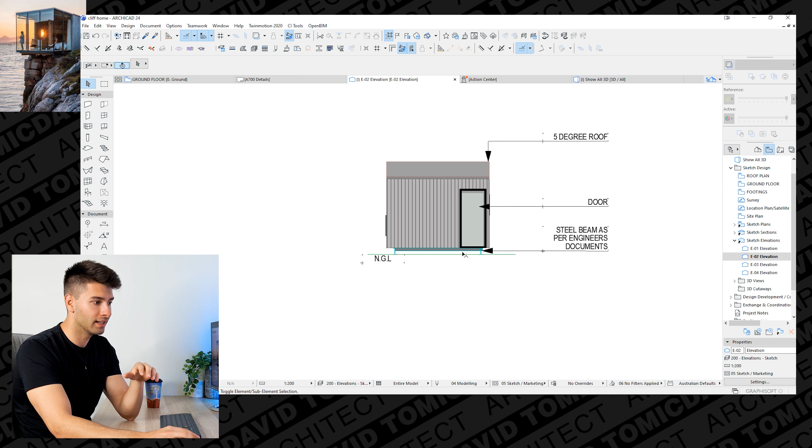Elevation 2 looks at the rear side from the natural ground level, and you wouldn't see the cliff or any of the water. So all we've had to do is draw one green line underneath those beams, which I've annotated steel beams as per engineer's documents because it's very early in the design, and annotate a door. So there's nothing really complex happening here. The only difference is there is no water level on this side because it would be beyond in the distance.

Elevation 3 looks at the complete opposite side of elevation 1. So we've literally just copied and pasted this green line and mirrored it across to create an identical ground floor of the other side, and just again copied and pasted those annotations across.

Finally, elevation 4 looks at the front of the building, which is what we see in that amazing image. And you're looking at the ground and you're looking at the water if you were to look at it dead on. So all we've done in this is draw 2 green lines, one for the natural ground level, one for the water level, just very generally assuming where the water level could be, because we have no information from the surveyor. We have no actual realistic information on this project. We're basically just making it up to see if we can replicate what we see on Instagram.

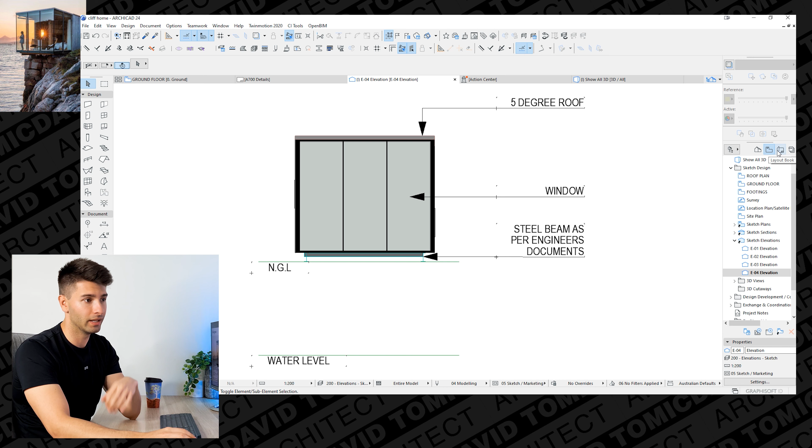Now that those 4 elevations have been completed, we want to export it to a PDF so we can actually take that project to somebody and show them what we've actually done, or even send it to them in an email. So we want to move across to our layout book, and you'll see there is a number of different options in the layout books. I personally don't like their layouts. They're just too confusing, too complex. There's too many stages and all sorts of bits and pieces. So I always have a tendency to create my own.

The easiest way for this project, because it's a very small project, is just to create a 1-page piece of paper that showcases everything. So we're going to go down to the bottom, create a new layout and call it Cliff Home, for example. It can be called whatever you want, and change that to an A4 portrait title block and click create. So it automatically creates that A4 title block page with the print guides, so you don't have to chop anything off when you're actually printing.

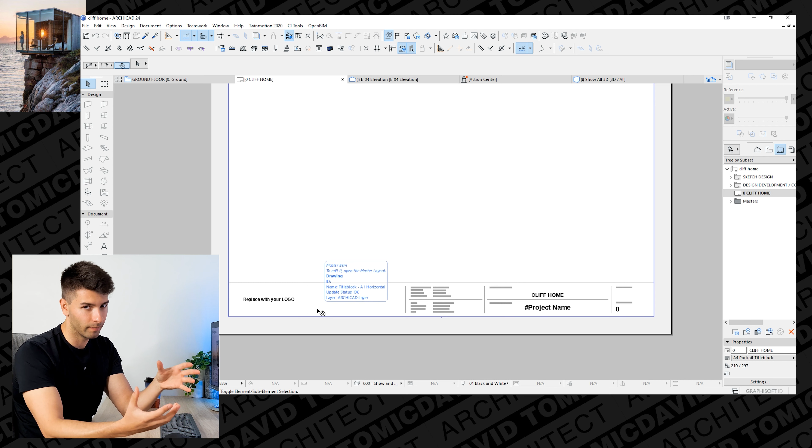I will go into another project of how to actually create these title blocks, what information you need, but for the purposes of this, you can very quickly and easily just change any of this information in the master section. So if I double clicked on that master project, you can actually go through, open the source view and change all this information as required. So we're not going to go into that in this video. We're going to close that master section there and go back to Cliff Home. So for the Cliff Home, what we need to do is open our view map, scroll up to the ground floor plan, click and drag our ground floor onto this layout book.

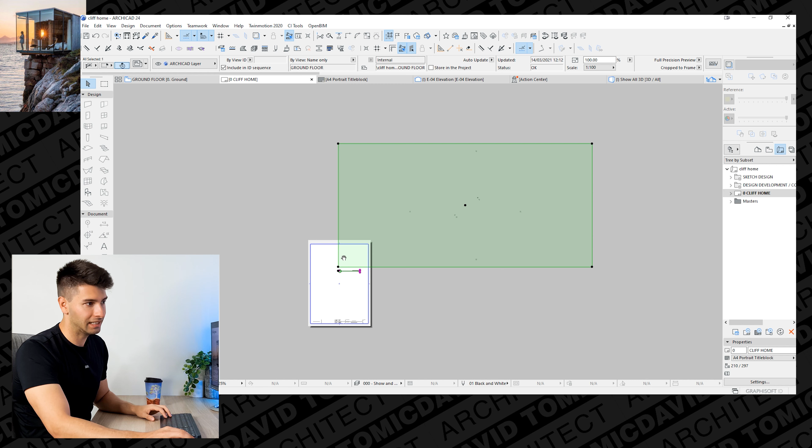What you'll see is it's dragged quite a large section of the layout over, and we don't need that. So we're going to use our offset edges and bring this back in to a much more manageable viewing space, and then click Control D to move it into the center top of our page.

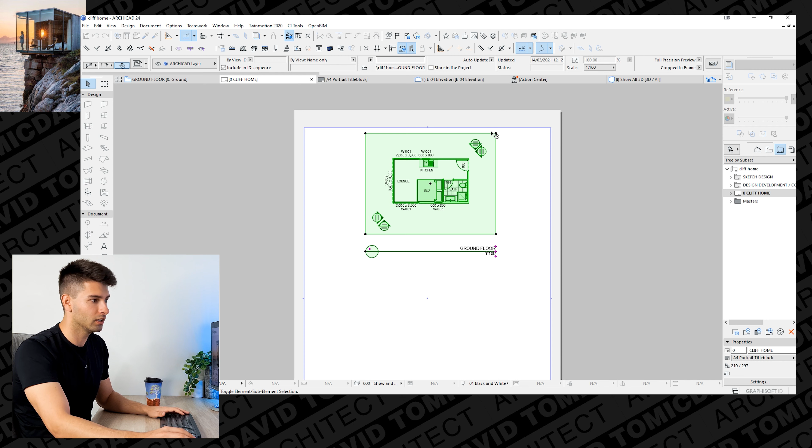I'm very pedantic about title blocks and everything lining up, so I like to stretch out my title block so it aligns with the invisible edges. It makes no sense, but it does when you're working in ArchiCAD.

Now we also want to have some sort of scale bar and north point on this project. We haven't created one on our ground floor plan, we haven't created one anywhere, but we can simply open up an object tool, type in scale to get our first scale bar, click OK, introduce that into the project. We'll move that a little bit further away from the house.

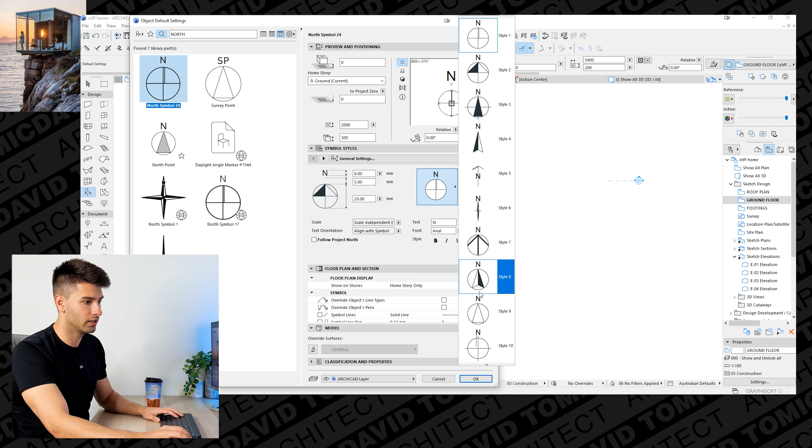We'll do the exact same thing with the north point. Now you can use any north point you want, you can annotate it however you want. For the purposes of this project, that one's absolutely fine. You have a variety of different options. We'll change it for the sake of just changing it and introduce a new north point here.

So now we have our north point, we have our scale bar, and if we go back to our Cliff Home in the layout book, we can drag another floor plan across and find our north point and scale bar. So one additional step that we didn't do in the last one, because we wanted that title block, is opening up the settings dialog.

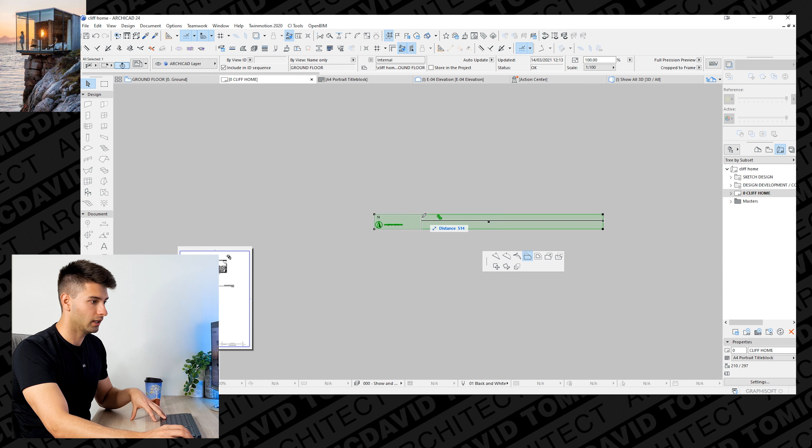Simply going to title, linear drawing, title, no title. That removes and eliminates the title, so when we actually drag this closer and hide everything else in this layout, we don't have an additional title for no reason.

Now you can drag this anywhere you like. In this instance, I would probably take away that north element because it's not required. Now, if I was to drag this somewhere, I don't really like that. I'd probably copy and paste that one across, hide the scale bar, hide the north point, and then move them individually.

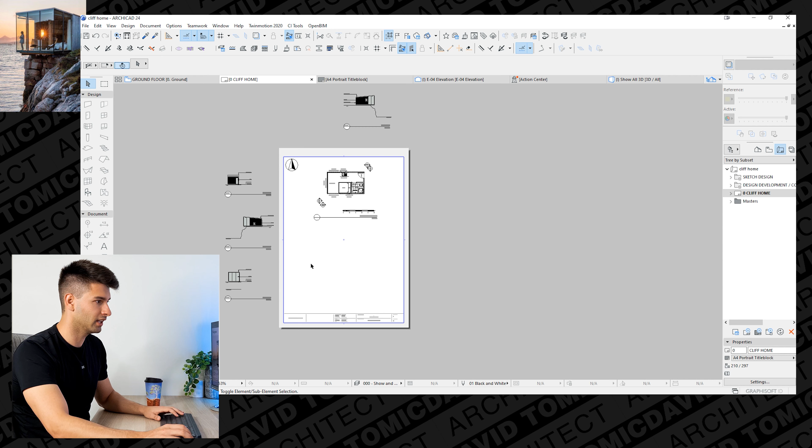So I'd prefer my scale bar here above my ground floor plan, and I'm happy with my north point there. What I then want to do is highlight all of my elevations inside my view map, drag my elevations across, let them update, which takes a couple seconds, move them all to a place where I can see them away from the layout book, find elevation 1, drag that onto my sheet of paper, find elevation 2, repeat that for all 4 of these elevations.

And then what we want to do is actually just start lining some bits and pieces up. So we want to align the natural ground level with that natural ground level. We want to align the title block by selecting move sub element with this title block. And we want to align that title block by clicking the stretch button with that imaginary window.

Finally, I'll move that a little bit closer to that elevation and center it. We'll repeat that exact same process with these two down here.

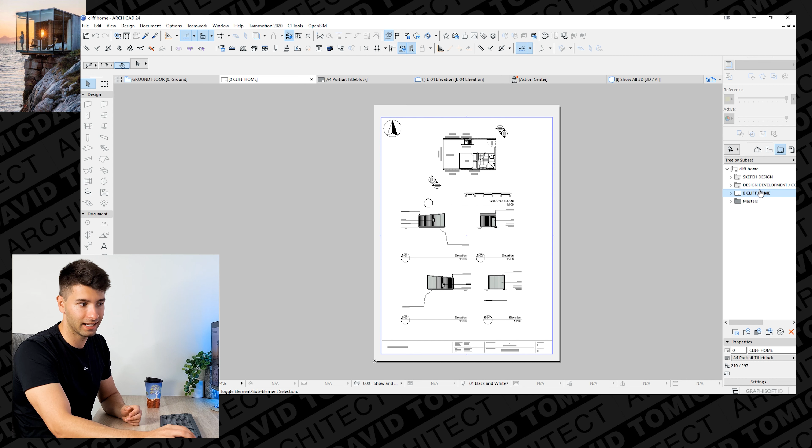Last but not least, we just have to export this as a PDF. So all we have to do is click that cliff home and select that page. If we have multiple pages, just hold shift and click on the last page to select them all.

Then we want to go to File, Save As. We need to change it from Archicad Solo Project to PDF file. And then we want to click on Document Options. So basically it's going to come up by default as entire layout, but we want to change it to selected layouts in Navigator only. Depending if you want it in black and white or color, you can also change that, but I'll keep it for color for the time being.

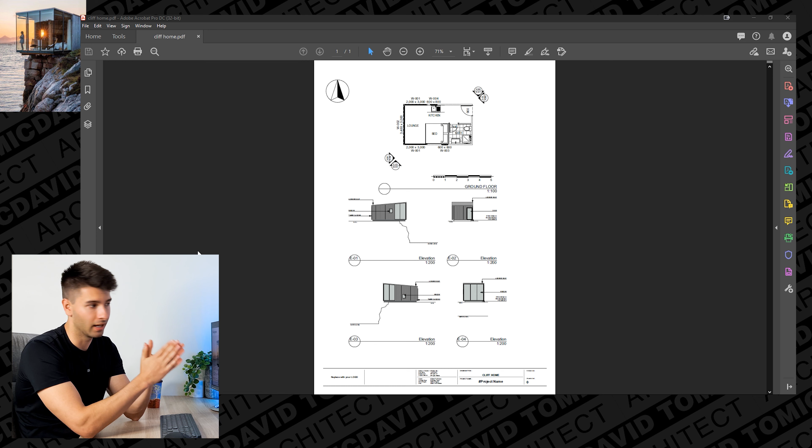And then literally all you have to do is press the save button. Within a matter of seconds, it'll be saved to your desktop. So if we go back to our desktop, open up our PDF, we'll see that that PDF has been exported exactly like we set it up in Archicad. It is a very typical PDF format, so you can use that as you would use any other PDF. You can print it, you can email it, you can copy it, you can do whatever you absolutely like with that PDF.